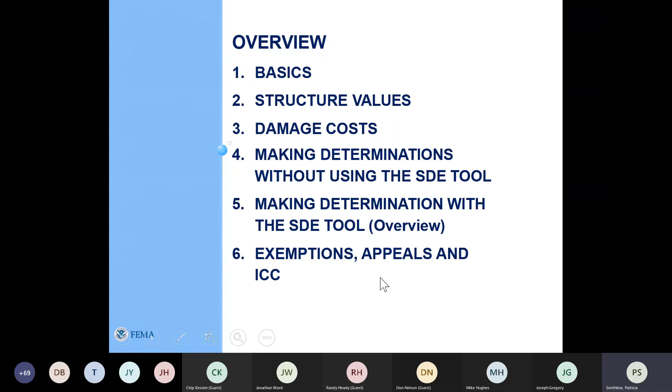Today, we're going to talk about the basics of substantial damage and substantial improvements. We'll talk about where you get the values to use to make that determination, and we'll talk about how very easy it is to make the determination without any special software or anything else. But then we will do a real quick overview of the free software that's available to you. It's called the Substantial Damage Estimator tool. I'm just going to show you quickly what it looks like. And after we do that, we'll talk about what to do if someone disagrees with your evaluation.

One is that substantial damage determinations are yours. They're the community's. It's not FEMA's, it's not the state, it is yours. So we want you to become very familiar with it because it is a part of your ordinance. Your goal is to bring structures into compliance with your ordinance to save lives and save property. And so that's the other thought that I want you to come away with. Your whole point in doing any of this is to save lives and save property.

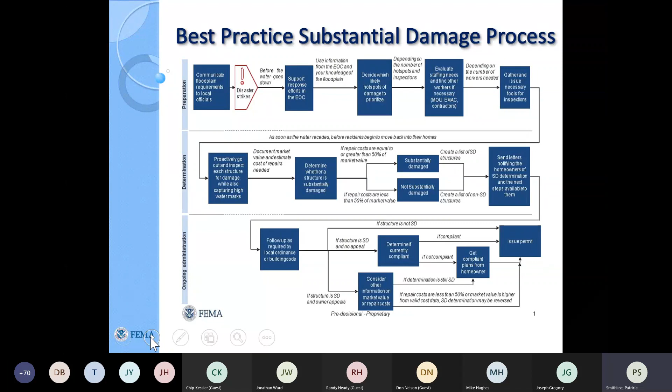So let's jump into the definition of substantial damage. Remember, I said it's damage from any origin, not just floods, but anything that causes enough damage to a structure that the damage is equal to or exceeds 50% of the market value of that structure before the damage occurred. So you want the pre-damage value of the structure.

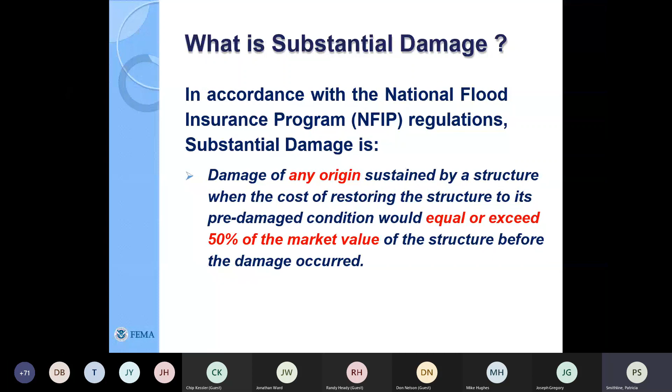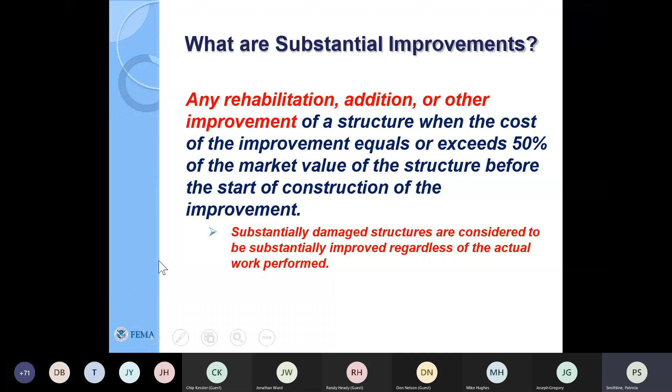Substantial improvement is the same thought process, but maybe not in the time of a disaster. Perhaps someone wants to add on to their home or redo any of it, really, even just roofing and things. It still behooves you to, through the permitting process, determine if the improvements they want to make equal 50% or more of their structure. If it does, that gives you the trigger to bring that structure into compliance with your floodplain ordinance. And again, remember, that's just if those structures are in the special flood hazard area. In blue sky days, it's important to let your community, the residents in your community, know about the concept of substantial damage.

You would do that through your permitting process, and so you need to be sure you let your community know what activities do require a permit, what don't, and what substantially damaged means in the special flood hazard area.

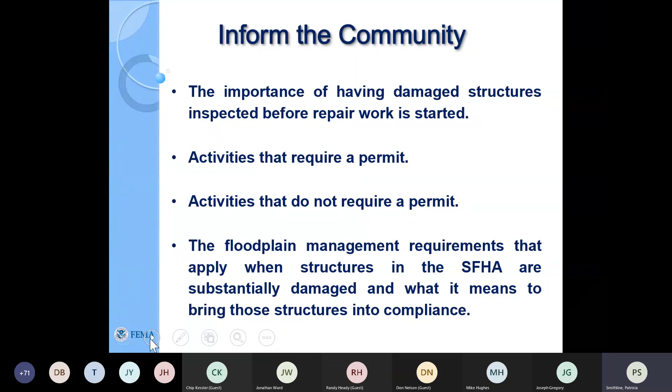I think it's important to remind people that our goal is to save lives and save property. It's not to dictate what they do with their house, but it really is a positive influence on the community.

We also want to break the cycle of disasters. We don't want to just keep throwing money at structures that need to be repaired. We want to bring them into compliance and get residents back into their homes faster by helping them

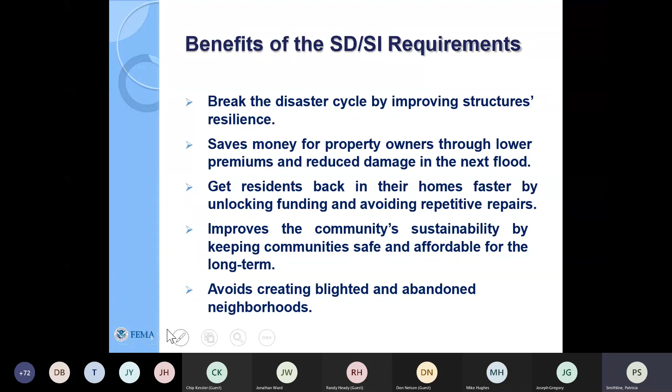get grants and other funding that can help them make their structures and your community more resilient. It also helps in neighborhoods that may be in special flood hazard areas and have not been maintained because of that. It can help you identify structures that are not meeting your ordinance.

Keep in mind, this is your information. You absolutely don't need to wait for FEMA or the state to collect this data after an emergency, after a disaster. You have various options of how to make these determinations.

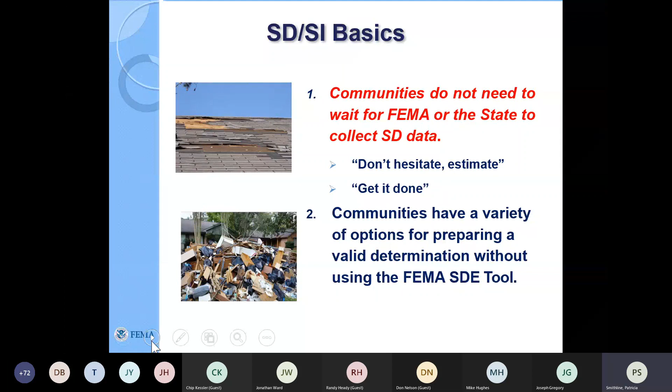Using the substantial damage tool or other methods, we'll talk about those in a little bit. But what happens if you really don't follow up with these determinations or don't do the substantial damage observations at all?

Remember that our whole reason is to bring your community into compliance with your ordinance. They're enhancing the NFIP program, and so therefore, if you don't, you could have the possibility of probation from the NFIP program. And if you are suspended from that program, then flood insurance is not available to your residents.

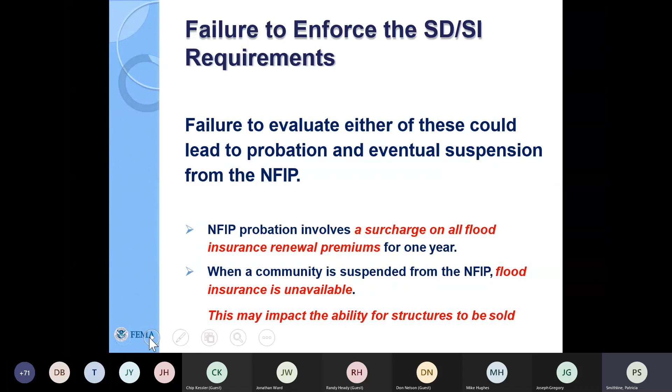This very much impacts your residents, but also the growth in your community. And again, it's important to remember that we only care about the structures in the special flood hazard area. You're probably, during your blue sky days, familiar with those areas.

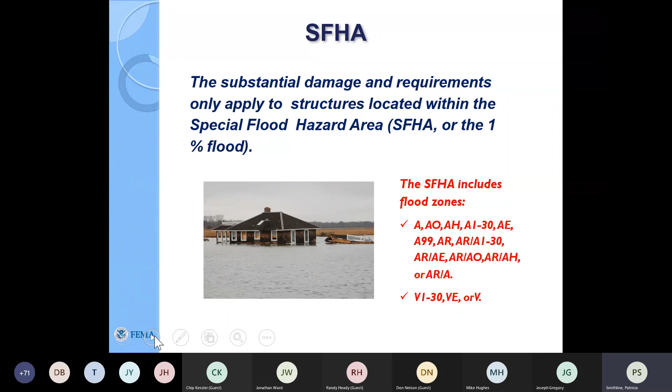When we talk about the tool a little bit, you'll see that you can pre-populate that software with the structures that are in the special flood hazard area.

There are two values that you need to determine substantial damage. And as we get into talking about this formula and what you need, remember, don't overcomplicate this.

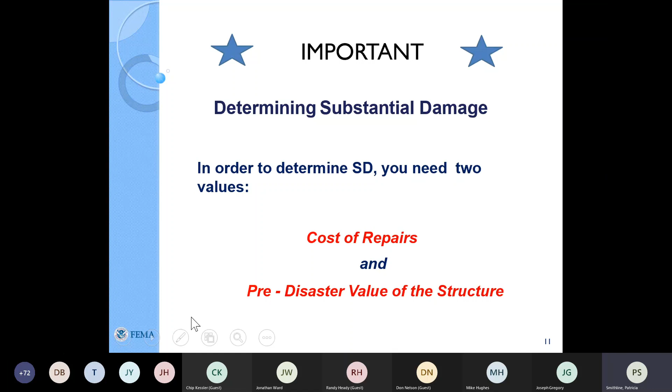I always tell people, do not overthink this whole process. All you need to know is the cost of the repairs and the pre-disaster value of the structure. And it's that simple, because you're just looking for the proportion of the cost of repairs to the structure value.

And if it is greater than or equal to 50%, then mitigation needs to happen to bring that structure into compliance. If it's below 50%, then there are no further actions needed. So always remember, it is just a very simple concept of the cost of repairs divided by the structure value. It either is or isn't over 50%.

This is where I remind people, when you're thinking about determining substantial damage, remember not to let yourself get in the weeds, as I call it. It's so easy to think, well, what if that and what if this? And if any of you have construction and engineering backgrounds, you'll really try to overanalyze and almost nitpick what damage is.

I always like to remind people, we are only looking for a percentage, sort of a soft number. And when we look for that percentage, we're just looking for it to be either over 50% or under 50%.

When you are determining these substantial damages, we find that if something is less than 40% of the structure's value damaged, there's very little that's going to change in your assessment and observations that will kick that determination over 50. So anything below 40, especially, don't dwell on or stress over determining the exact pennies on this.

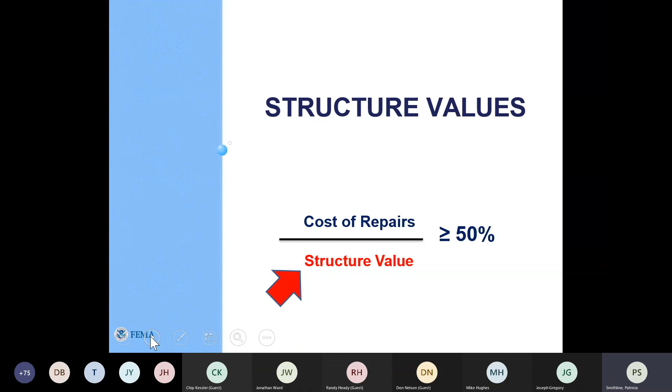Let's talk about how you get that structure value. That's one of the key components. Very, very important to remember is that the value is for the structure only.

It doesn't include the landscaping. It doesn't include detached buildings or structures, only the structure itself. And it also must be the pre-disaster value.

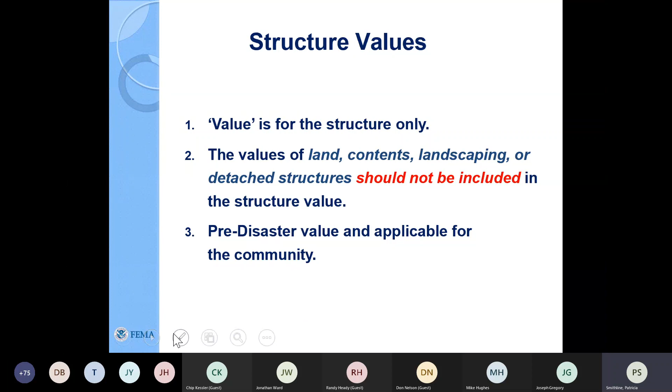I heard a great example out of another state once of somebody that did not do repairs immediately. In fact, they waited about 10 years to do repairs from an event. The question came up, how do we decide substantial damage or not from that? Well, it didn't matter that it was 10 years ago, because you still need the pre-disaster value of the structure. Not land, not landscaping, just the structure.

There's several ways you can get that. You can develop a cost per square foot, multiply that cost per square foot by the square footage of the structure, and then factor in some depreciation. That could give you a structure value.

You could take assessed values. I want to caution you about that one. When you're looking at tax assessed values, remember that sometimes your assessed values may be adjusted up or down for various reasons. I'll give you an example of that.

I was working a disaster, in Texas actually I think, and there was a town that needed some rebirth downtown. They really wanted to attract businesses to come redevelop their downtown area. So when we pulled their tax assessment records, they had some structures that were, let's say, a 2-story masonry building about 8,000 square feet total, that on the tax records was assessed at $4,000.

Now, we know that's not really an accurate assessment of the brick and mortar part of that structure. That's a great example of remembering that your community may be adjusting tax assessed values for various reasons. This community adjusted them down to attract business into their downtown area, so we couldn't really use those tax assessments.

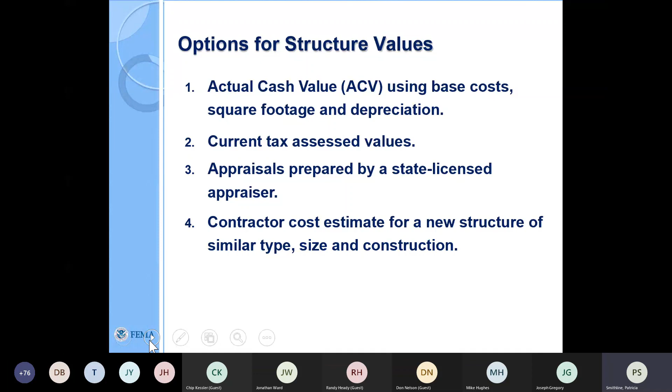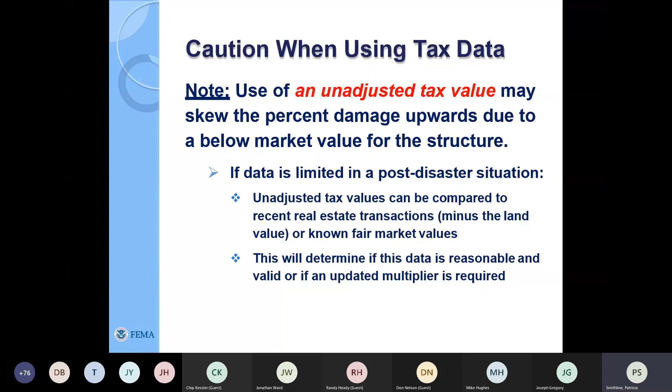We talked about the things to consider when using tax data, so always remember to adjust that tax information to reflect the true value of the structure, not the unadjusted tax value, which might be skewed one way or another based on what your community is going through at that time.

Let's say you have a fire or a flood, and someone's structure is damaged, and they think this is a great time to do those improvements they'd always been thinking about—let me go ahead and add that room on. Is that okay, folks? Yeah, it's perfectly fine. But when doing your substantial damage or substantial improvement evaluation, you'll always include those improvements, even though that part of the structure didn't exist when the damage occurred and wasn't damaged itself. It is still an improvement to the property.

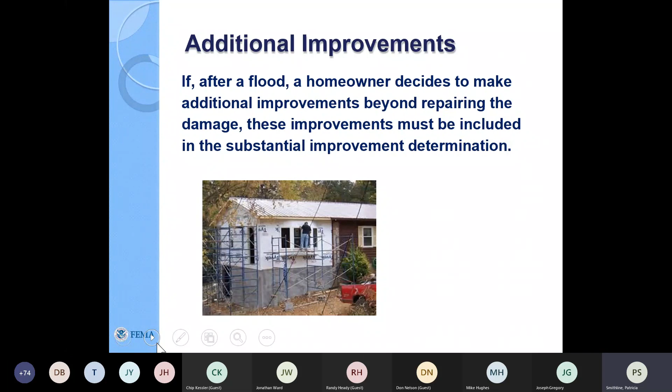So you're still only looking at those same two numbers we were talking about: the cost of repairs and improvements compared to the pre-damage value—not the value of the structure after the improvement is put on there. We're still only looking at the pre-damage value. But if it should come up, yes, the additional improvements and enhancements to the house are included.

So we talked about structure value. Let's talk about where we get the cost of repairs now.

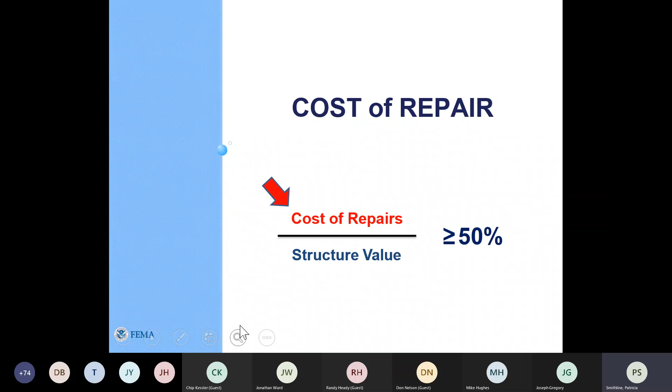I think the best source for the cost of repairs after damage is to get a licensed contractor's cost estimate. Be careful and observant when you receive those, because you want to be sure all of the applicable repairs are on there, and that all of the labor costs and materials are included.

As a community, you might allow owners' cost of repair estimates. And if you do, maybe the owner wants to do their own work, or maybe they have a brother-in-law who's a plumber and another who's an electrician, so they think it won't cost much. But their cost estimate must still include all elements of repair.

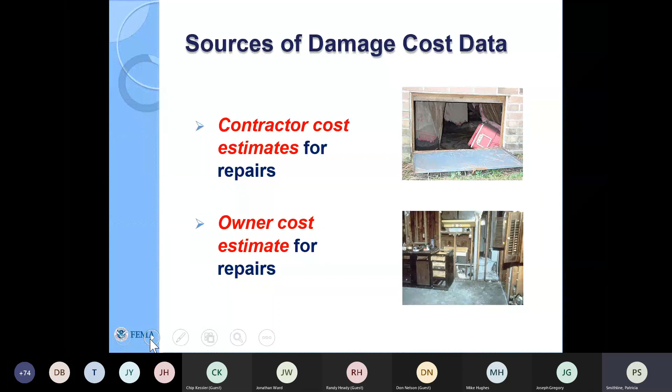It has to reflect the market value of all materials, whether they're donated or not, accurate for the market, and the cost of labor, everything involved, even if someone's going to do the work themselves. We just want to be sure the cost estimates, wherever they come from, are accurate, reasonable, and complete.

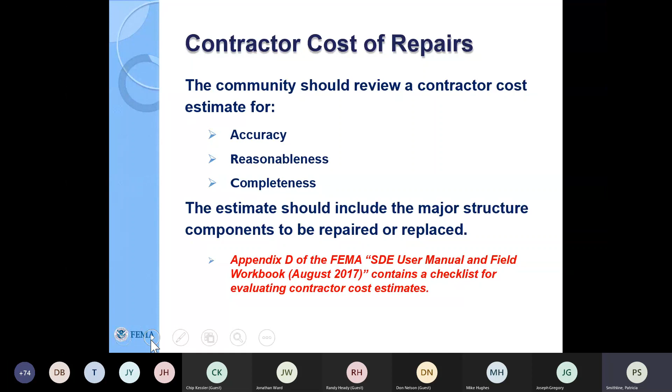There is the Substantial Damage Estimator, that software tool I talked about. There's a user's manual included, which gives you a good checklist for being sure all of the essential elements are in your cost estimates. You can get that online. We'll have a link in a little bit, or you may have received it prior to this training.

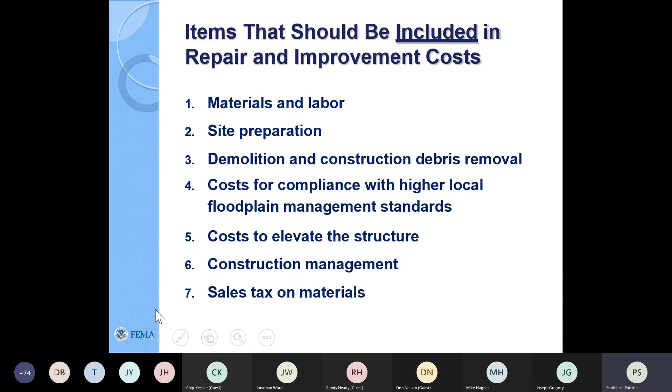Remember, we want to be sure materials and labor are there, site prep, any demo that needs to be done, all the costs for everything, including sales tax and construction management, are eligible to be included in that estimate of repairs. But there are some things that are not, like the cost of the appraisal, the plans and specs, and the permit fees. Again, all of this is denoted in that desk reference.

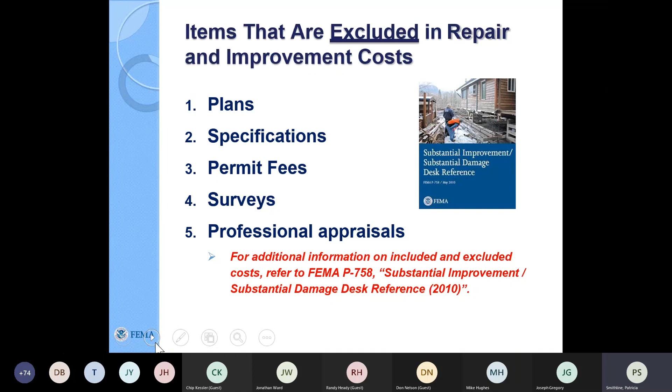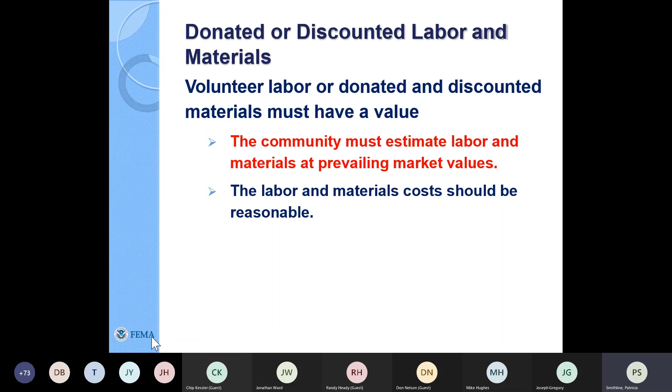Remember, we talked about donated or discounted materials; they cannot be used at that discounted value. That's great that materials can be donated, however, for the sake of the substantial damage or substantial improvement calculation, you must have an accurate reflection of all costs involved in making that repair or improvement.

So how do we do this? It's easy. Remember the formula for the substantial damage or substantial improvement equation? You literally just do the math. If you have the appraisal and the contractor's cost of repairs, you divide the contractor's cost of repairs by the value of the property. Or you can use the free software tool I mentioned called the Substantial Damage Estimator tool.

Always remember, though, that our goal is this 50% threshold. Anything below that will not trigger coming into compliance with the ordinance. And that's why I always say, don't overthink this calculation. We're just looking for whether it's over 50% or under 50%.

If you use any methods other than the appraisal and the contractor's estimate of repairs, you'll come up with what I sort of call a soft number, an estimate. That's okay, because again, we're just looking for whether it's over or under 50%. Also remember, we'll address in a little bit, what to do if you provide that estimate to the property owner and they disagree and want to revisit it. That's okay.

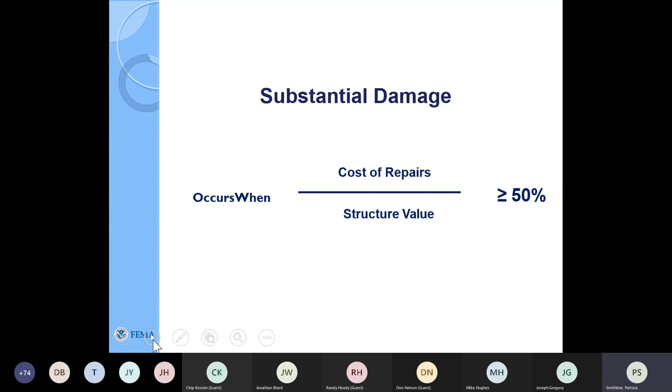So remember, we talked about how easy it is to use this formula when you have the contractor's cost of repairs and the structure value. But let's say you don't have those, or you need to put this information together quickly for your homeowners so they can get through your permitting process and move on with repairing their structure and moving back in. This is that software tool I mentioned.

It's called the Substantial Damage Estimator software, or SDE. Remember, I keep saying estimate - that's the really important word here. It's an estimate, not an engineering observation. We're not making any measurements; we're making an estimate, and that's okay, because we're just looking to come up with either over 50% or under 50%.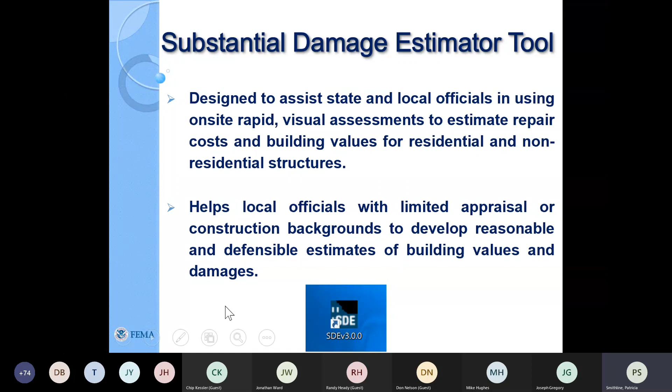It was designed as an easy tool for folks to go out into the field, make observations without having to measure anything much, and then determine whether that structure is or is not over 50% of its value damaged. It is so straightforward that folks in your workforce who don't have a whole lot of background in engineering or construction can actually make these observations as well. So you should be able to put together good teams to go into the field and make the observations using this software tool.

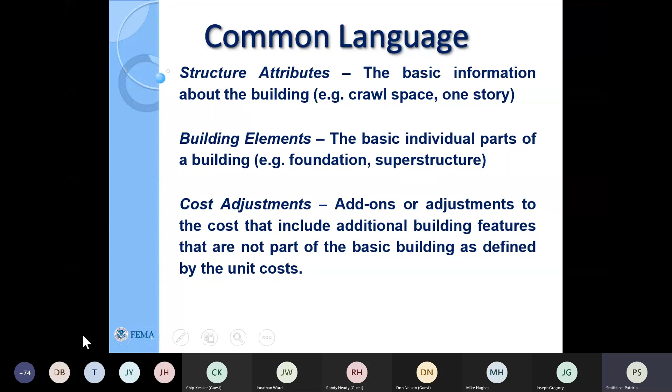There are a few things you look for, both when you're making observations based on appraisals and cost estimates, and also when you're using the substantial damage tool, such as the basic structure attributes. How many stories is it? What kind of foundation is it on? The building elements, such as the structure, the load-bearing walls - are they wood frame, are they masonry? And any other important adjustments, such as very high-grade or very low-grade construction, can also be included in your observations.

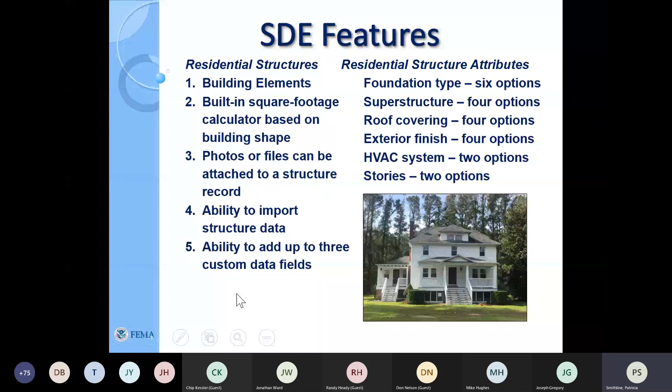Things you look at in the field: what type of structure is this, what kind of foundation, what kind of superstructure. That software gives you options to choose from. You take photographs and document your files with those photographs, and you can import information as well into that software. You can look at not just residential buildings, but non-residential and manufactured homes as well.

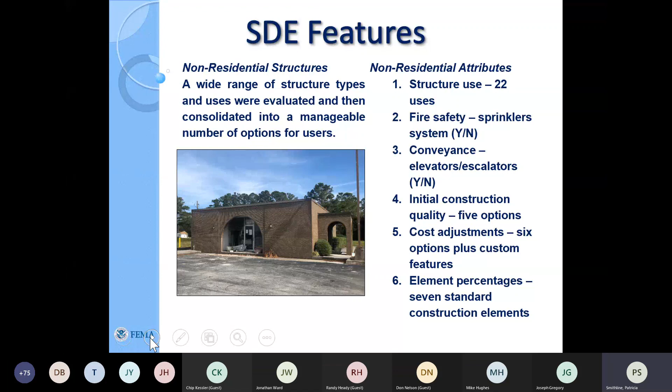The software and your own thoughts when you're out in the field do not look at all the same attributes on residential and non-residential. In the same way, if in your substantial damage calculation what you got was a professional appraisal, that appraisal also looks at a few different attributes on non-residential than it does residential.

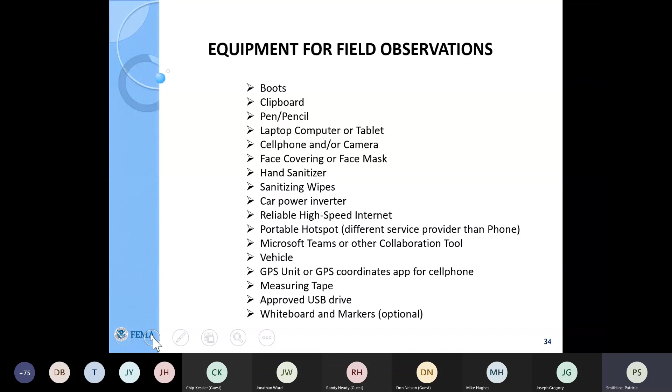When you go into the field, there are certain tools you would need - we won't dwell on these, but picture yourself going out to make observations in the field. In a COVID environment, let's even think about the safe ways as you put together your plan in your head and for your community for those disaster times.

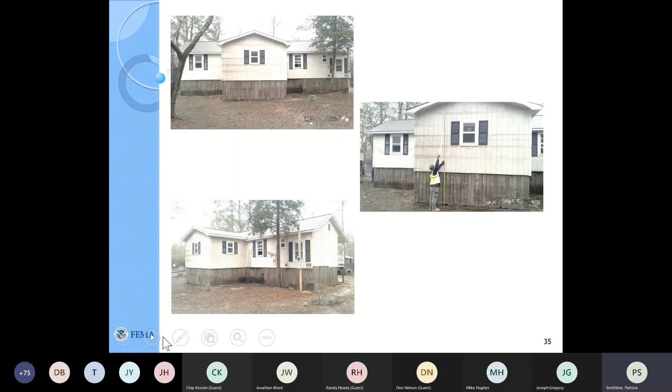There are a few measurements you're going to make when you're in the field, such as the depth of the water above the ground, above the adjacent grade, and also above the first floor. Those are just a few measurements you'll make, but you'll see that you can use some worksheets that walk you through each of those. You don't have to carry the things we talk about in your head - you don't need to memorize them.

The beauty of this software tool is that you look at each element by itself. You don't have to have someone very experienced in building construction or a general contractor eyeball a whole building and say, okay, I know that one's 42%. No, you can use this method to look at each individual element of the structure - just the foundation, what kind of damage did it get, just the superstructure, just the floor finish and other areas.

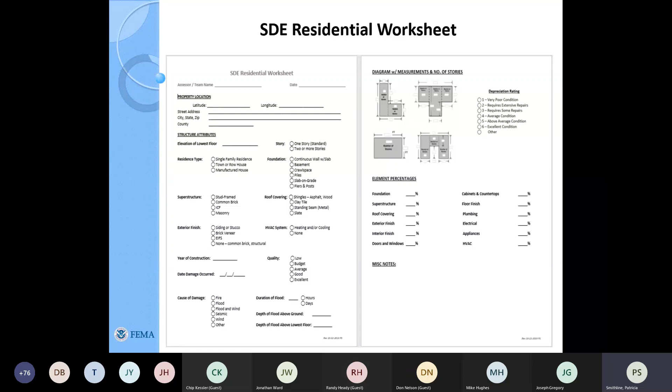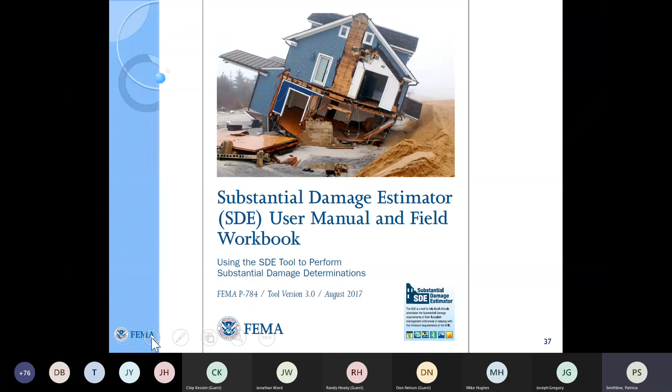There's also, as I mentioned before, the substantial damage estimator software has a very useful user's manual as well. When you download this software, you'll see the link for the user's manual. We also have some cheat sheets, if you will.

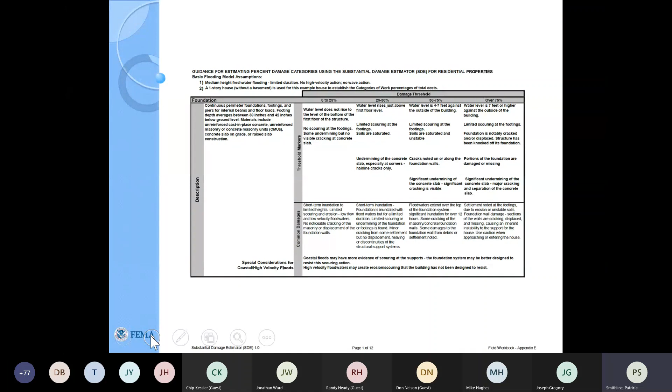Again, remember, I keep saying we don't have to have folks that are experts in building construction to help you determine the substantial damage estimates. These cheat sheets - this is an example of the one for foundation - let you determine the water level and how much damage, and then rely on these columns to help you decide on the percentage of damage as you're looking at the damage to each of the elements. So again, don't get bogged down in the exact measurement of that damage. This is an estimate and a percentage.

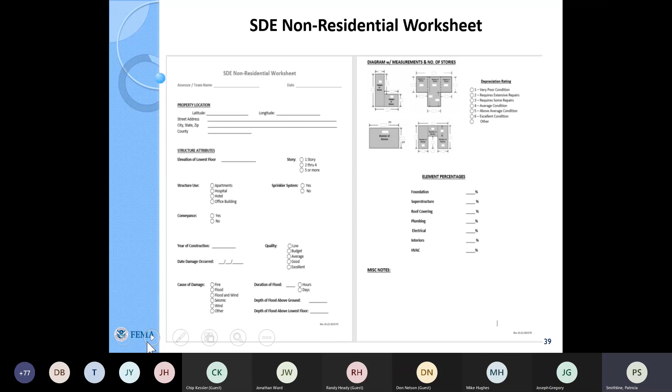I mentioned the non-residential. We don't look at quite as many elements for a non-residential structure as we do for a residential one. So the field worksheet that you see here can help you walk through the non-residential damages as well, and the same for manufactured houses - a few different elements that we look at.

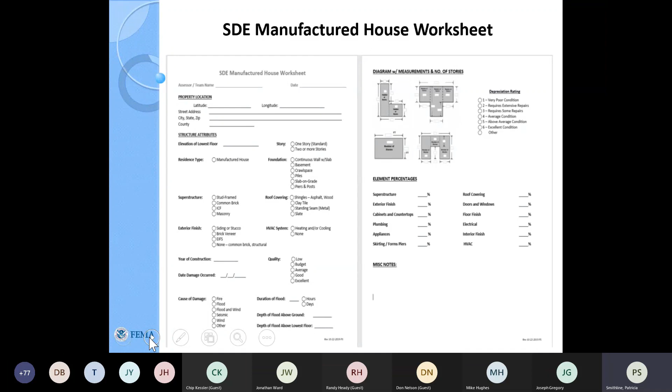Photographs, when you are in the field to do a substantial damage or substantial improvement observation, photos are so important. I like to suggest that you take at least two to show perhaps all sides of the structure, and to show, if this were a flood, the depth of the water, and include the whole entire structure in that photograph.

So I really like to reinforce with you all, as you're documenting your substantial damage file with the photographs, be sure you get the whole structure. Sometimes I've had some teams go into the field and bring me back a picture of the front door, and sometimes they just get a picture of the house number by the front door. I think what they're thinking is that they just need to prove that they were there, in case anyone questions that they actually were physically there.

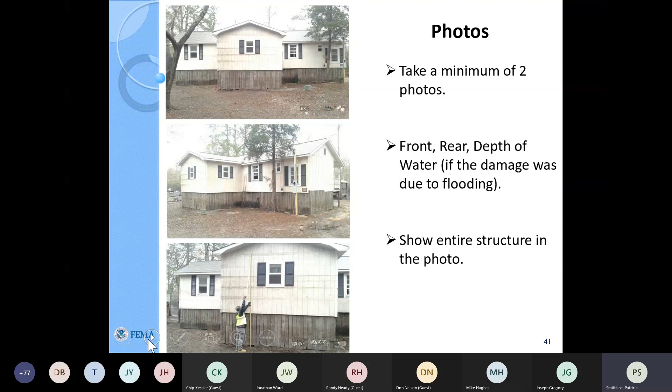But always remember, that's not the purpose of these photos. The purpose is to give you very good documentation for your substantial damage database and files, so that you can look back and evaluate. Also, if someone goes through an appeal process, you would want to refer back to what you saw in the field as well.

I'm going to flip through a little bit quickly what the screens in the substantial damage estimator software look like. We won't go tab by tab and talk much about them. I just want you to get an idea of what it looks like and how it could help you if you choose to use it.

The second tab in the software talks about those attributes that we mentioned. What exactly is the building? How many stories does it have? And what's the roof covering? What kind of foundation does it have? This is the area you would record all of that. And also in that area you would record information about the damage. When did it happen? How long did it happen? What was the event? Was it a flood or fire?

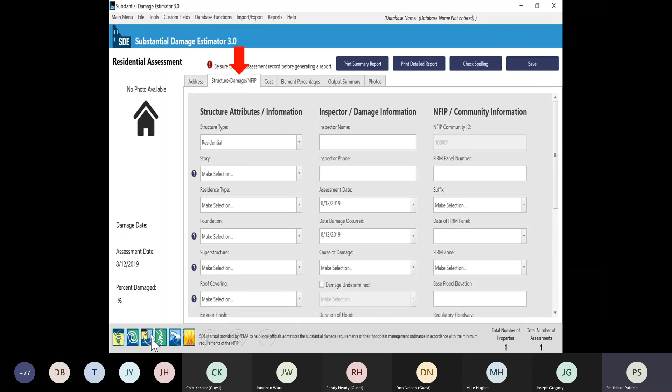On that next tab, that tab helps you determine the structure's cost if you choose to use a cost per square foot and the square footage of the structure. The software tool calculates that automatically for you, so again it saves you time in the structure value calculation, and it can help that layperson who doesn't have a good feel for what structures may be valued at. This software tool can help you determine that - it's a very quick and easy way to do it.

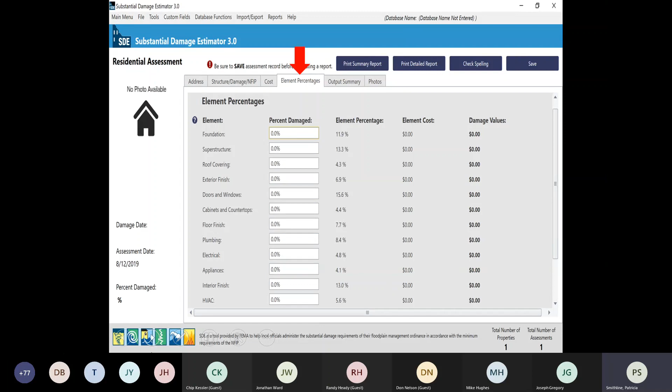Here's the screen that gives you the meat of the matter. Each of those structure elements that we talked about, you evaluated them in the field, and here you record your observation for each element - the amount of damage for each element. But the beauty of this software package is that this column shows you how each of these elements are weighted, because as you can imagine, the roof covering is not as large a cost component to the value of the structure as, say, the foundation is. So again, the beauty of this software, or others like them, is that it properly weights each of the elements into the amount of cost they would need to contribute to the total damage, which is what you're coming out with at the end of this.

You can use this software to give you a method to use any of the valuation things we talked about and the cost of repairs. Remember, do we want to compute the value using the square footage and the cost per square foot, or do we want an appraisal, or are we going to use a tax value? You can choose which of those. And in the same vein, where did I get my damages - did I let the software do it, or did a contractor give me an estimate of the repairs? In that way, this software tool can help you toggle between different methods if someone asks for a reassessment.

Let me stress that prior to doing any substantial damage observations after a disaster, you as a community must choose your method of assessing damages and valuing properties, and then use the same method for all structures you observe and evaluate. You always have to treat all residents the same way; you can't use one method for one and another for another. That's especially important to remember as you're putting together your substantial damage program.

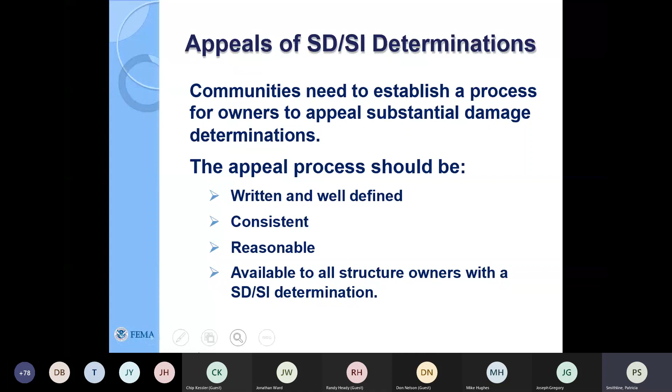Let's go back a second and talk about some exemptions. There are certain structures that don't fall into the whole discussion we've just been through, such as repairs or enhancements done to a structure that correct code violations to bring it into safe living conditions. Different rules also apply to historic structures and the mitigation that can be done to them.

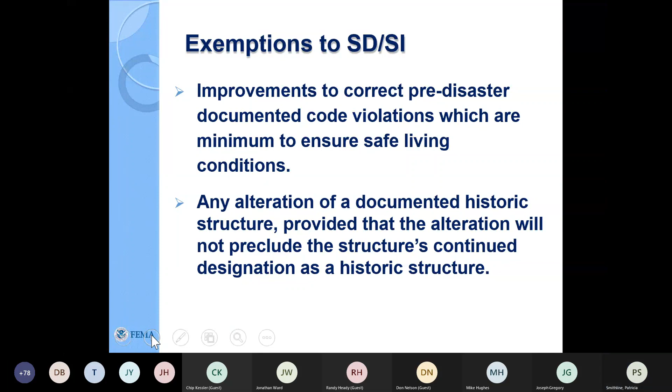The other element to consider, after all your substantial damage observations have happened, is the Increased Cost of Compliance, or ICC money, available to homeowners through their flood coverage under the NFIP. To be eligible, they must be located in the special flood hazard area and have that flood insurance policy in place. The damage does have to happen because of flooding. The ICC money only applies with flooding, not fires, tornadoes, and other things we discussed that affect substantial damage but don't come into play for ICC money.

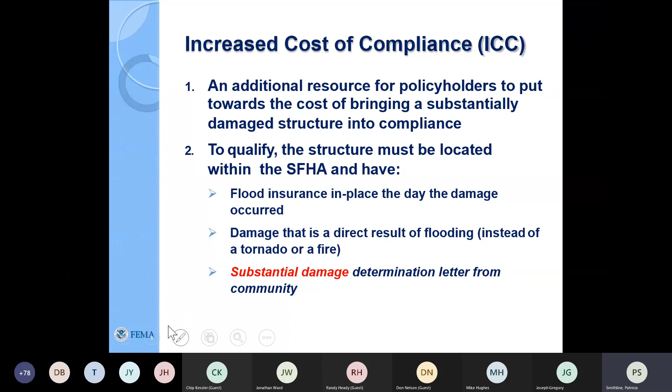But the real important thing here is that they must have a substantial damage determination document from you. Remember that report I mentioned that you can generate from the software and send with your cover letter to the structure owner? That can be the determination that helps your community receive their ICC money.

The ICC provides up to $30,000 to help bring that structure into compliance. There are other particulars we can go into in different sessions about insurance, but the ICC money helps homeowners become eligible for mitigation that we sort of lovingly call FRED—the various methods to mitigate a structure to bring it into compliance with your ordinance.

Remember, the whole reason we're doing all this is, like I said, the thing I want you to take away today: to save lives and property. So FRED stands for Floodproofing, Relocation, Elevation, or Demolition—the methods of mitigation to save lives and property in your community.

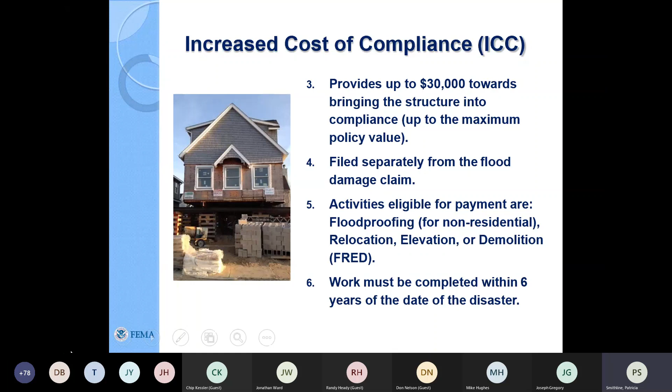That is the overview I have for you today. I wanted to leave a few moments for questions or comments. We've touched on many topics, so if there are any you'd like to hear more about, such as specifics on that software tool or examples of what you do in the field, please let your state folks know and we'll schedule that. Any questions or comments?

I have a question. Okay, I'm getting some feedback. You might have two devices turned on. Possibly.

Most of us are floodplain administrators. I wanted to make sure whether or not the software you demonstrated is also applicable to other natural disasters that are not necessarily related to flood, and whether it should be used by various building departments.